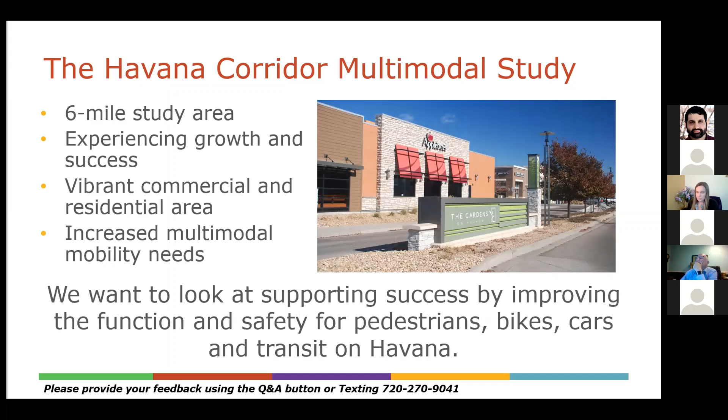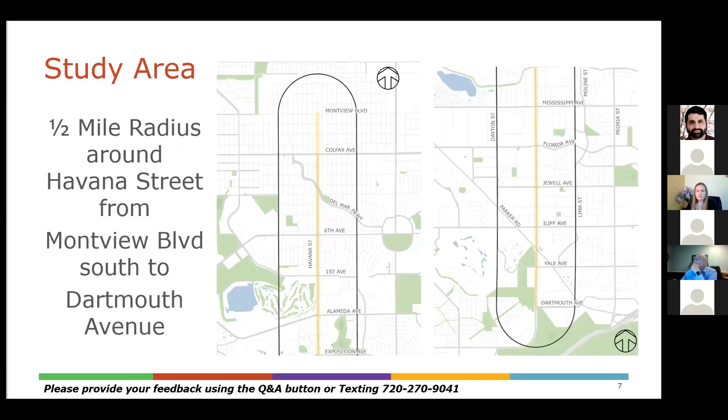The study area encompasses a half-mile radius around Havana Street from Montview Boulevard on the north down to Dartmouth Avenue on the south end.

We've established some goals for this project to make it successful as we consider the existing and future users and mobility demands on this corridor. It's important to balance the types of uses, the modes of travel, and focus on safety for all users, because that will promote the economic viability of this corridor. It's also important to us to maintain an identity of a cultural hub - meaning we want to celebrate the diversity of the businesses on Havana and ensure their future success. We know they've gone through really hard times with COVID, and this is providing us an opportunity to get good feedback and do something important on this corridor.

So we'll jump into existing conditions. We'll talk about demographics and pedestrian, bicycle, transit, and vehicle conditions along the corridor, as well as land use. However, before we do that, we have a question for all of you. We'd like to know how you would describe biking, walking, transit use, and driving in the Havana Corridor study area today. Please provide your responses using the Q&A button or by texting 720-270-9041.

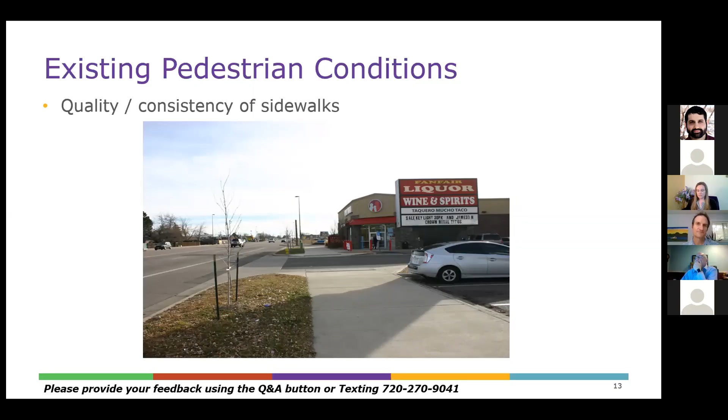If we advance to the next slide, this is just a quarter block down. So what we transition to here - I'd ask you to put your visualization hat on as a pedestrian. You're walking past the Fanfair Liquor southbound on Havana, you pass that business, and then you transition into what looks like a commercial parking lot.

As a pedestrian, you're uncertain - you don't know, is this a sidewalk? Is it a parking lot? I'm not sure. And if you continue south, you advance into a very nondescript, unimproved portion of the roadway or right-of-way. It currently doesn't have any pavement at all next to this vacant facility. So this really points out you go from a very good facility that meets standard and is very accommodating for pedestrians, into a kind of nondescript area, and then into a very uncertain, unimproved area.

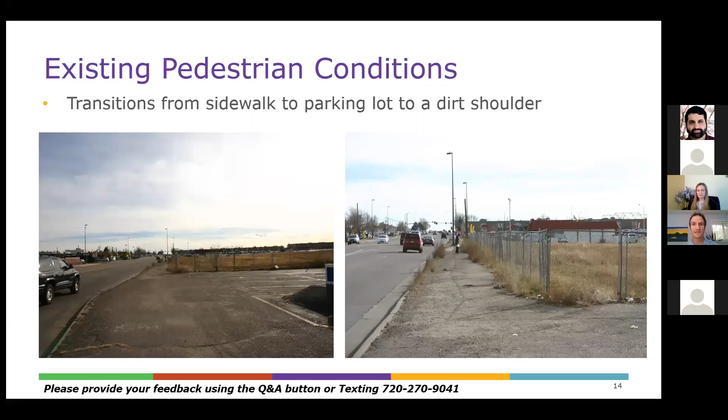The issue with the image on the right is that by walking along a facility like that, you have little to no separation from the lane of travel. So if a vehicle were to depart from the lane of travel, or if a pedestrian were to accidentally step out into the lane of travel, which is more possible on such a narrow facility, there's limited room for error, shall we say. So we found facilities like this, most especially in the northern half of the corridor - I would say mostly between Colfax and Montview. Next slide, please.

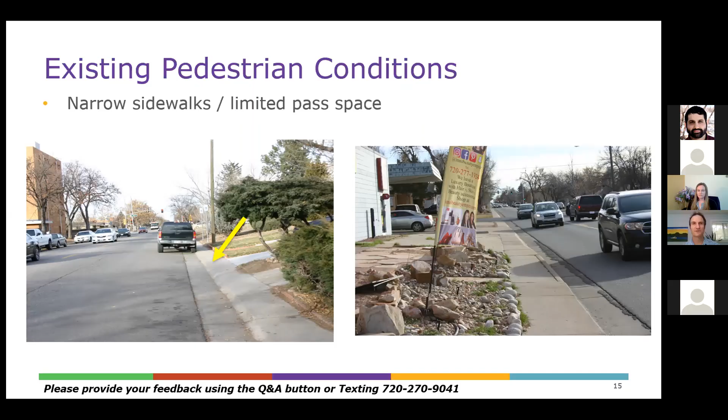In a lot of locations, though this isn't true of all intersections and curb ramps, we found that narrow sidewalks, when they meet intersections, transition into substandard curb ramps, where either the slope, lack of truncated domes, or the angling and orientation of the ramp to the intersection are substandard. These pose issues for pedestrians, specifically reliable access to the intersection and opportunities for crossing.

Whereas some crosswalks on the corridor do meet standard, are designed to current code, and are edged by well-maintained surfaces, there are several that are not. So that poses an issue for pedestrians.

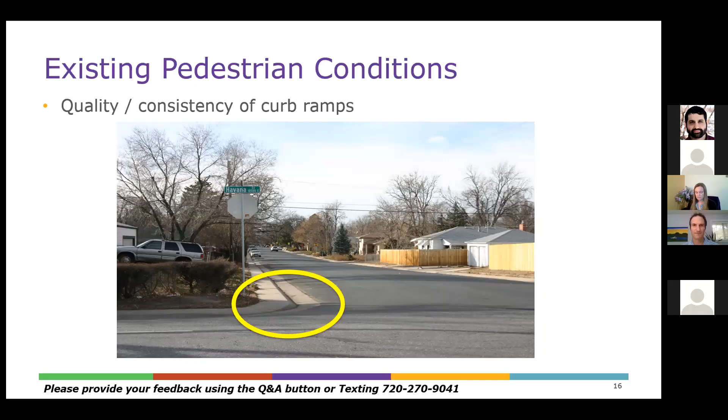We identified in our existing conditions report that in several segments of the corridor there are up to half a mile between marked or improved crosswalks where pedestrians clearly have the right of way. That can result in jaywalking, where pedestrians take the most convenient path and cross in an unmarked location. Given the volumes and speeds on Havana, that can present issues.

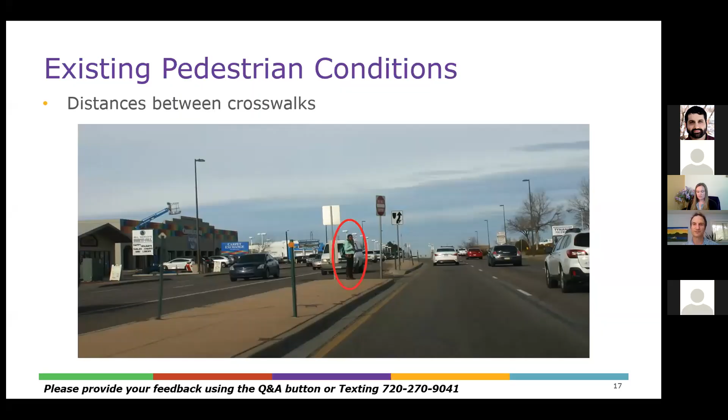Lighting is a very important factor for pedestrian comfort, safety, and access. If you're walking after dark, whether to a transit stop, a business, or a residence, for both perceived and real safety and comfort, ideally you want lighting that illuminates the entire public right of way.

Especially at intersections, you want sufficient illumination between motor vehicles and pedestrians to reduce potential conflict, particularly at higher speed turning movements where motorists may be turning onto or off of Havana while a pedestrian is attempting to cross. A deficient level of lighting presents real safety concerns.

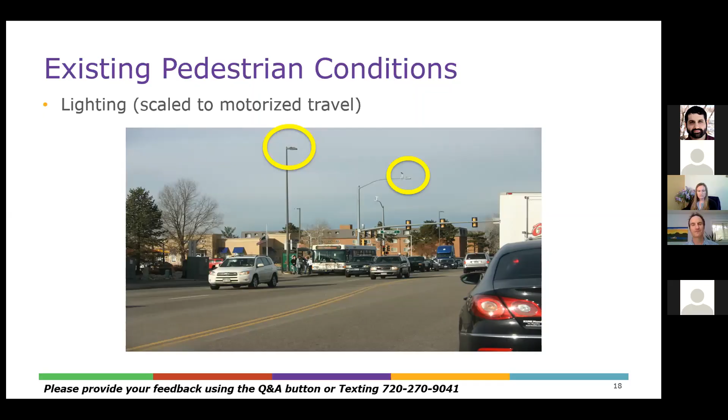Our key takeaway is that, because of the lack of continuity or consistency on many portions of the corridor in sidewalk type, location, and condition, this generally adds up to stressful pedestrian conditions. If you're attempting to walk on the corridor, the inconsistency and unpredictability in some, though not all, locations creates stressful conditions for walking. There is an element of risk and danger, though that's not unique to Havana.

Pedestrian-involved collisions only made up 2% of total crashes, however 50% of them resulted in a fatality or some injury to the pedestrian. On the positive side, there are 3 connections to off-street multi-use greenways and paths along the corridor, providing tremendous opportunities for better connecting pedestrians to those paths as we look at the future of Havana.

Now, bicycling. As we said at the very beginning of the presentation, there are currently no designated bicycle facilities on Havana, though people do ride on it. This gentleman is riding on what is probably an undefined social trail, an unimproved area people use for walking and biking, but it's not a sidewalk.

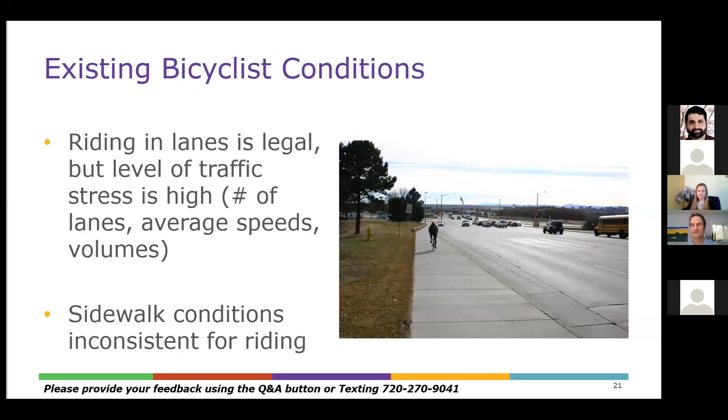I did want to call out that there are east-west bike lanes at four locations immediately adjacent to the corridor. Most notably, many of you have seen it or maybe ridden it, the Moline-Lima parallel bike lane extends for about 3 miles, from the middle of the study area down to its southern end. But we did note that on the west side of Havana there is definitely a shortage of east-west on-street bike lanes. So that's something we note as a possible deficiency to be addressed in the recommendations.

Okay, so our takeaways for bicycling, then I'll pass it back to Jennifer, who's going to discuss transit. There were a lower number of total crashes involving bicycles on the corridor, but it's similar to pedestrian crashes, and 50% of those did result in injuries of some kind. Riding is permitted in lanes, but it's generally highly stressful due to volumes and speeds. Sidewalk riding is permissible, but the conditions are often inconsistent. I'll end on a positive note with Cherry Creek Trail, Colgate Creek Trail, and the Highline Canal Trail. There's tremendous opportunity for improving connections to those off-street multi-use trails at many points along Havana. So that's the bike-ped story for now. Looking forward to your questions, and I'll pass it on to Jennifer to talk about transit.

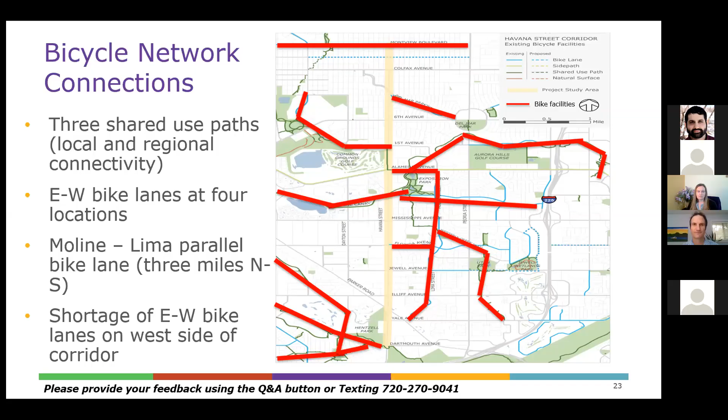Okay, so we'll go ahead and move on to transit conditions along the corridor. Route 105 is the route that runs up and down Havana Street corridor. It's a very high ridership route, serving 6,000 riders per day. It's the second highest ridership bus route that doesn't go downtown, and the 7th highest ridership bus route overall within the region. It serves 48 bus stops and connects to 11 east-west routes along the corridor, including the 15L, which runs on Colfax.

Just so you're all aware, the 15L is the 3rd highest ridership bus route in the region after the Mall Ride and the Flatiron Flyer.

We also looked at amenities for the transit piece and identified that 31% of the stops along the corridor have none - no benches and no shelters. 42% of the stops have only benches, and 27% have both shelters and benches. What's important to note is that the 31% of stops with no amenities are on the very low ridership routes, so the amenities are serving a very large population of the ridership along this corridor. In some cases, ridership is so high that additional benches or shelters may be needed in the future because there are so many people at those stops.

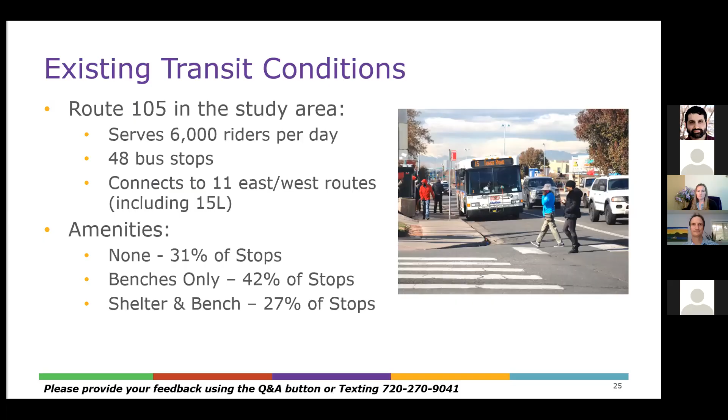We also considered lighting, which as Ted mentioned is very important for the pedestrian realm. We looked at each bus stop along the corridor and identified how close or far the lights were. If within 50 feet of the stop, we considered that good; further than 50 feet, we considered that bad. North of 6th Avenue and south of Jewell Avenue, we have very poor lighting - the bus stops are dark in the evening. This makes it unwelcoming for riders, and as the days get shorter, it becomes more problematic even during evening rush hour.

We identified the transit travel speed along the corridor, which was 13 miles per hour on average across the entire corridor. This includes buses stopping at stops to pick up riders and stopping at signals. The average bus delay is 4 minutes - meaning the bus has a scheduled arrival time, but on average it's up to 4 minutes late arriving at each stop.

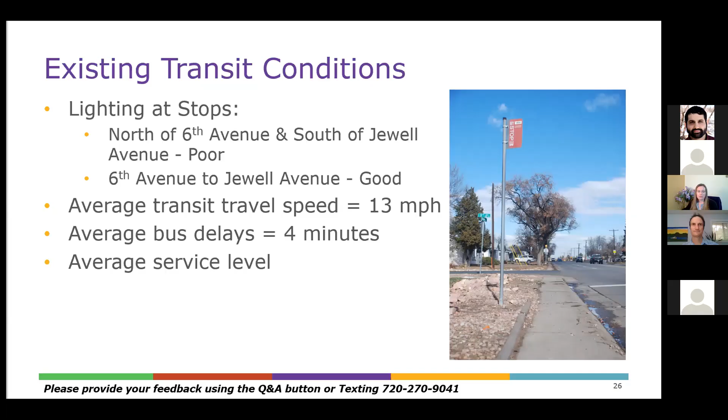Based on this data and other data we compiled, the level of service for transit along the corridor is considered generally average. The good news is there are transit improvements that have been funded - the city won a grant to improve transit efficiency, reliability, and overall performance. This includes bus bypass lanes and queue jumps, which let buses get ahead of traffic before signals change, relocating some bus stops for efficiency including bus bulbs that make it safer for pedestrians, and more technical improvements like transit signal priority, which helps buses get through signals more quickly.

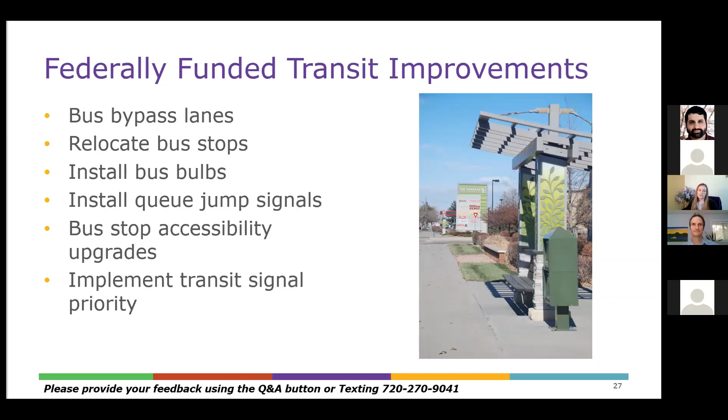So, the transit key takeaways: there's very high ridership on this corridor with somewhat limited amenities, some areas of poor lighting, and low travel speed with high delays. But the good news is that improvements are coming.

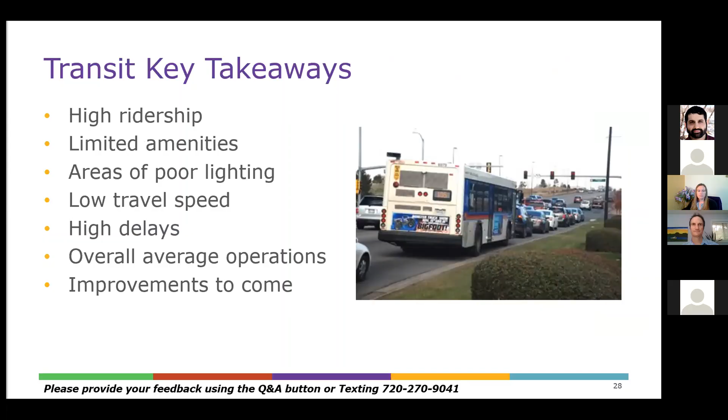I'll go ahead and dive into the vehicle conditions along the corridor, and then we can check for any additional questions on the transit and vehicle pieces.

Looking at vehicle conditions, the corridor is 6 miles long, anywhere from 2 to 8 lanes wide, with a posted speed limit of 30 to 45 miles per hour. The number of cars driving along the corridor varies greatly - north of Colfax, about 10,000 cars per day on that section of Havana, but down at the intersection with Iliff, closer to 48,000 cars per day through that intersection. So the solution for this corridor is not one-size-fits-all - we have a wide variety of conditions we have to consider as we move forward with recommendations.

However, one common theme we noticed is a lack of available right-of-way to widen the road. So widening the road to add bike lanes or wider sidewalks isn't really an option at this point.

We also looked at vehicle delay - as you're driving along the corridor, how much delay are you experiencing at the signalized intersections or because of a congested roadway. We noted areas of minor delay, shown in green, from 6th Avenue North to Montview. We identified areas with longer delays between 6th Avenue and Dartmouth, and areas with the longest delays at the intersection of Iliff and Havana. As a reminder, that's also the location with the highest volume, so you have the most cars trying to get through that intersection, and there's only so much you can do.

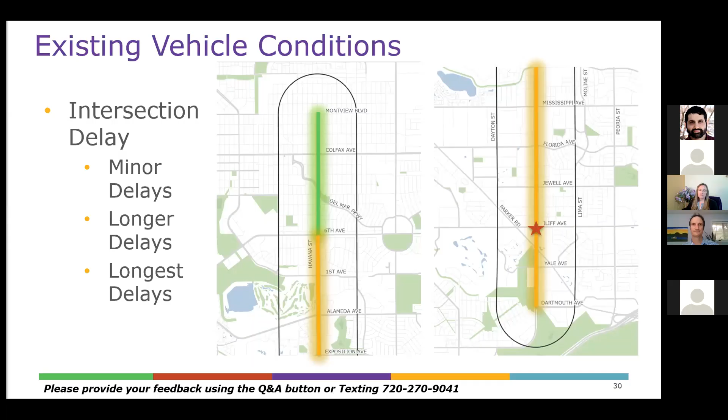We also looked at crashes, and from 2012 to 2019, we identified approximately 7,500 crashes along the corridor. What's interesting to note is that all of the fatal ones, shown here with red stars, occurred at signalized intersections. That's something that's key and something we are going to look at as we move forward with this project.

So the key takeaways for the vehicle component: we anticipate increased development, which is going to increase traffic. There is limited right-of-way, so we can't really widen the road to add new amenities - we've got to work with what we've got. That's going to require creative solutions to reduce vehicle demand and congestion. So what we plan to do is consider multimodal improvements as one of the ways to accommodate future demand.

Before we jump into the land use piece of this, are there any questions, Anne, on the transit or vehicle, or even the bike ped components that we'd like to touch on?

Sorry, it took a moment to get to the unmute button. We did have a question going back to sidewalk conditions, lighting, and greenery. The person asked, is there a plan for widening the sidewalks along the corridor and also adding greenery and lights?

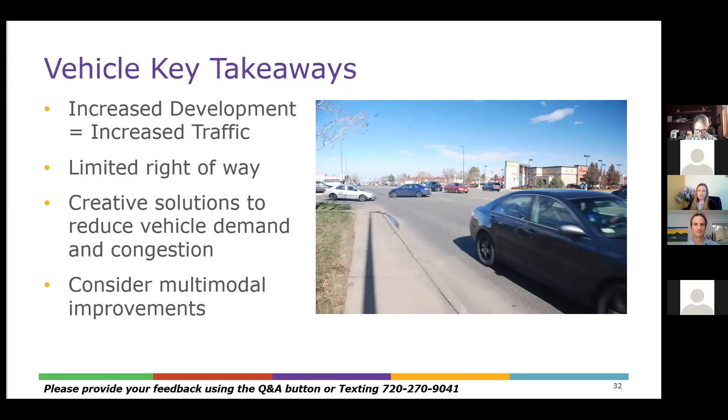So we've got one at Colfax, First Avenue, Alameda - just south of Alameda, between Alameda and Exposition. We've got one at Mississippi, between Florida and Jewell at that signal, and then at Iliff. So we do have all of that data. We can provide any additional detail in the comments and responses that we'll provide at the end of this meeting. But a lot of that data is in the existing conditions report.

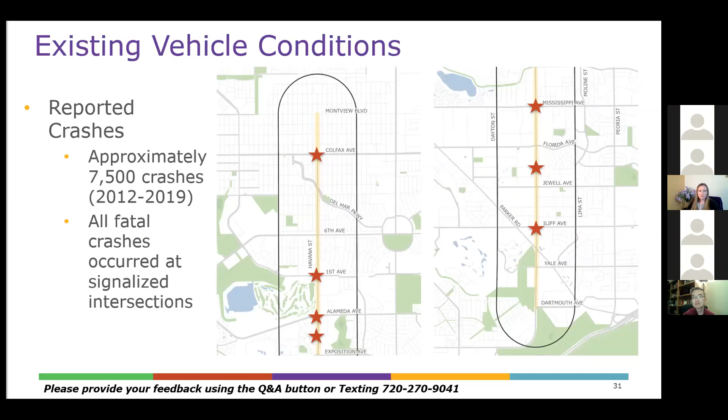All right, we're going to go ahead and jump into the land use piece of this. Cheney Bostic is with Studio Seed, and she is assisting us with the land use component for this study.

Hi, everyone. I'll just go through three quick slides here talking about along the six-mile corridor, we will also be looking outside of the right-of-way, what we call land use - in other words, what's happening on the private property of properties fronting Havana.

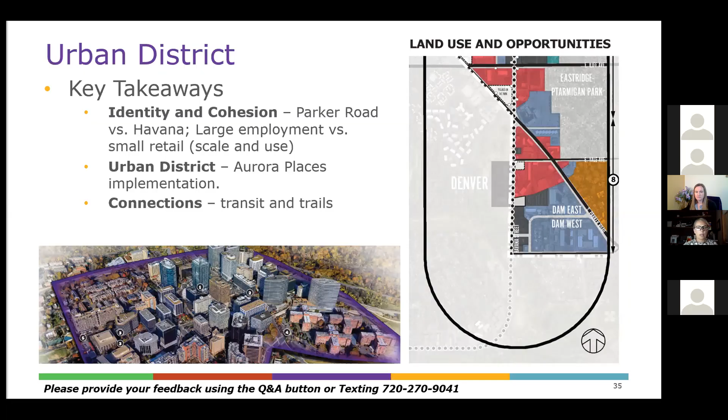Great, we've got 2 more. The first one, could you orient us to where downtown Aurora is, as we're referring to? Yeah, if you go back to original Aurora, 2 slides ago. So generally, if you can drag the cursor over that yellow dashed line, because I don't think they can see my cursor. Yes, that is downtown.

Excellent. And then are there opportunities to build affordable housing in the urban district or city corridor? Absolutely. There is quite a bit of affordable housing in the corridor today, but not directly on the corridor. That's something that when we talk about multimodal corridors and connections to transit, having the Havana corridor and the RTD line be one of the busiest, affordable housing is certainly something that we are interested in pursuing.

And then one more did come in, and this is down in the weeds a little bit more, but are bike racks, do you know, in your review of the conditions, are they a requirement of commercial development? Yes, I believe that is a requirement in zoning. I am not 100% sure, I don't have it in front of me, but it should be.

Yeah, this individual agreed with you, they just wanted to affirm. Cheney, this is Tom Worker Braddock, I'm a senior transportation planner with the City of Aurora. Right now, we do have a requirement to have bike racks be part of any new commercial development. I believe it's either up to 10% or 15 bike racks, whatever is less. And then a portion of those bike racks have to be located within easy viewing distance of the major entrance of the development.

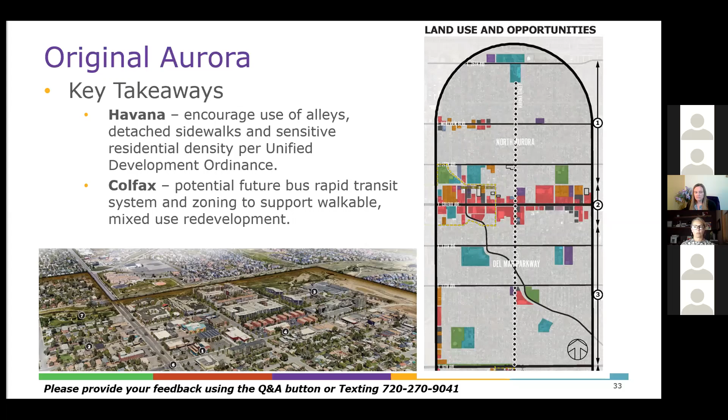Well, thank you, Anne, for your hard work behind the scenes, much appreciated. So Anne has identified some themes within the comments and what you guys have told us, which is that walking on narrow sidewalks is dangerous and uncomfortable. I think we would all agree with you on that. There's not enough safe spots to cross, and it's challenging or dangerous to cross so many lanes.

This gets to Ted's point where he talks about having refuge islands for pedestrians and other avenues to try and make it safer for pedestrians to cross the road. The vehicle speeds are dangerous. At this point, I don't know if there's any plan to change the speeds on that road, but that's certainly something we can discuss with the city and CDOT about.

Transit is a key asset for this corridor, absolutely. And transit stops should have sufficient amenities and be connected to the sidewalk. Without those connections, it's really hard for transit users to get where they need to go, particularly those who are disabled and can't jump over a curb or bumpy sidewalks.

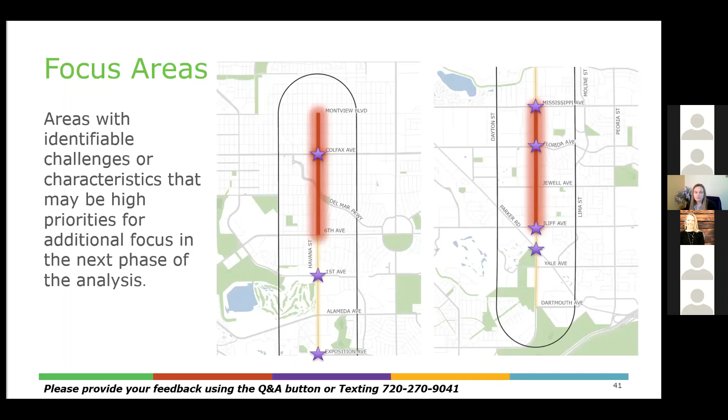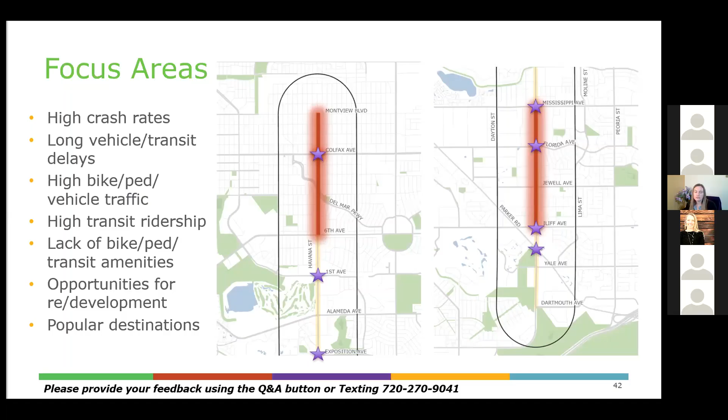The things we looked at to identify these focus areas included crash rates, long delays for vehicles or transit, high bike-ped or vehicle traffic, high transit ridership, locations with a lack of amenities, or important opportunities for development or redevelopment.

So hopefully Anne has had a few minutes to— Yeah, Jen, before you pull it up, let's pause for a minute and maybe just repeat this question, see if we can get a couple more. Okay, so the question again was: in 10 years, what would be the description of an improved biking, walking, transit use, and driving experience on the Havana corridor study area? We've gotten a few responses. Sorry, I should have taken longer to get through those slides. That's all right. I think I'm not seeing anything necessarily new come in, so you can go ahead and pull it up. But, all right.

All right, so what we're hearing so far, and feel free to continue to provide us some responses. We will incorporate all of the input that you provide to us. So what we're hearing is autonomous vehicles is key. That is something that we know is coming. We don't know when. I know that there's certain things that CDOT and possibly even the city, Carly might be able to chime in on this, but I know that there are some agencies that are including wider striping between the lanes, which is what's needed for those autonomous vehicles. And the city may be doing that as well. More of a complete street architecture for Havana, where the corridor is safer for all users and less auto-focused. So less auto-focus, more thinking about the other users, which is the direction that we're heading at this point because we do have limited right-of-way. So we've got to basically use what we've got and work with that.